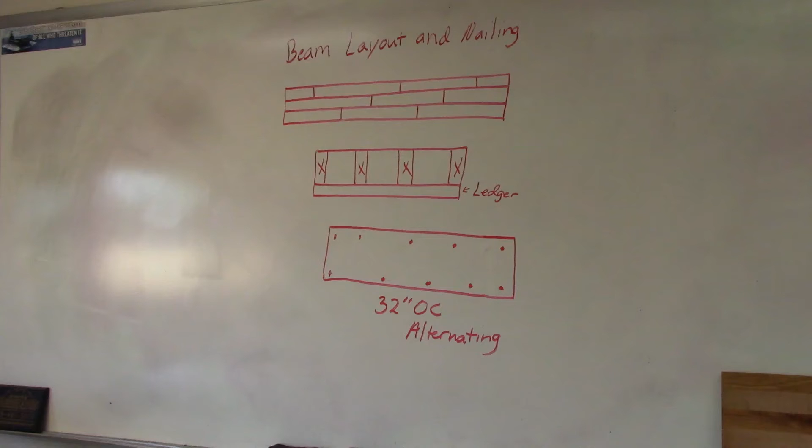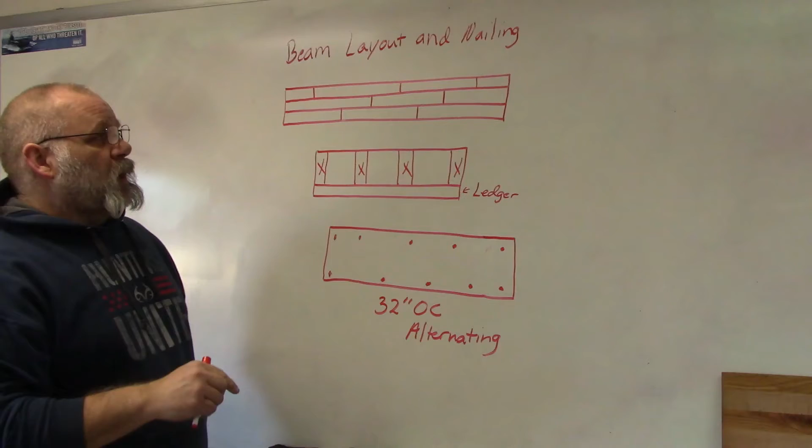Okay, in this video I'm going to show you how to lay out and nail a beam. Things you need to remember with the beam when you're laying it out: first of all, you have the seams where the boards meet. Code says that they have to be at least 4 feet apart. So if this one's here, then this one has to be at least 4 feet from it. This one has to be at least 4 feet from that one, and so on.

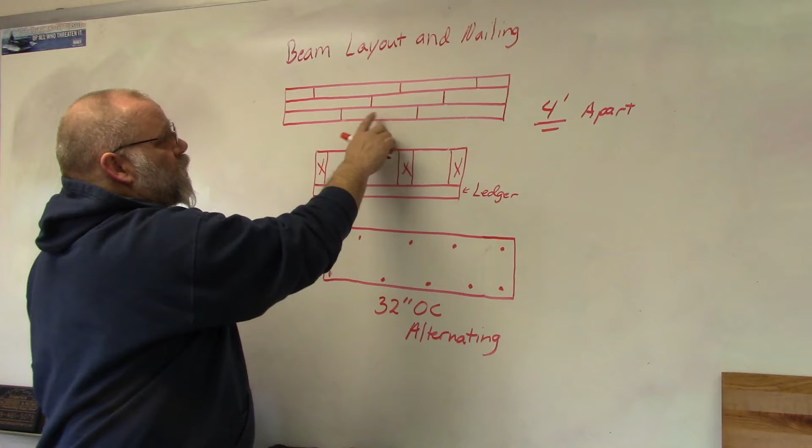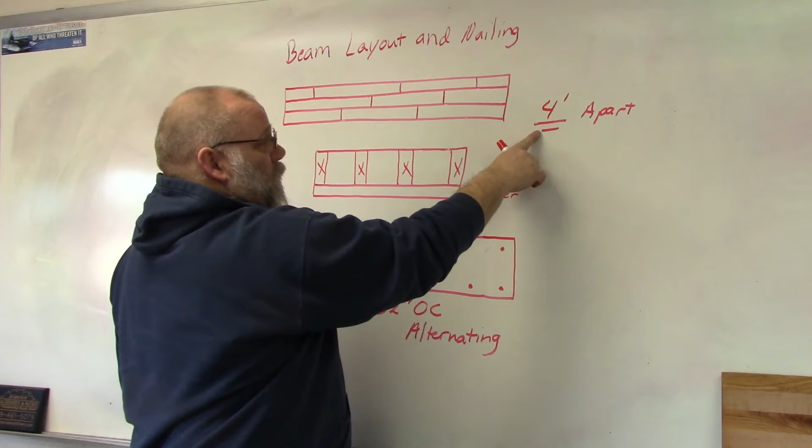So you stagger your members for your beam so that these do not line up from one board to the next. So, seams 4 feet apart. Now, if you're going to put a ledger board on here, so from the side, you have your 3-member beam with your ledger board nailed on there, okay?

Now, code for this says that under each of the floor joists, I have to have 3 nails. Try not to put them all in a row, because if you put them all in a row, that may crack the board and thus weaken it. So stagger them: put the high one to the left, the middle one to the right, the other one in between them, so that they're not in a row and don't crack your ledger board.

Generally, the way I did the ledger board was we took a 2x4 and ripped it in half. We mark a chalk line and put the 1.5 inch side up so it's nice and flat. The floor joist would sit on top of that. Then we would nail each of the 3 nails under each of the floor joists, along with the nails that would go from the floor joist into the beam. So, nailing the ledger board on.

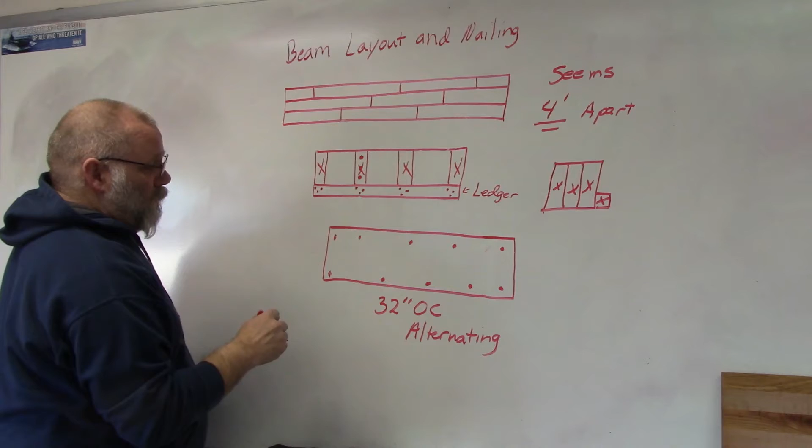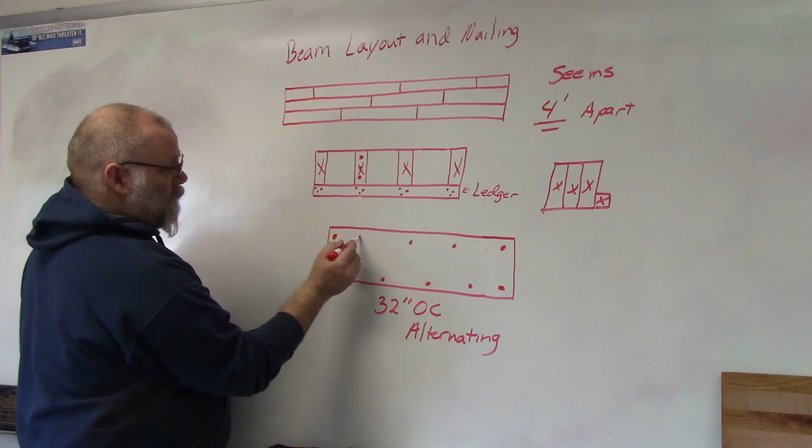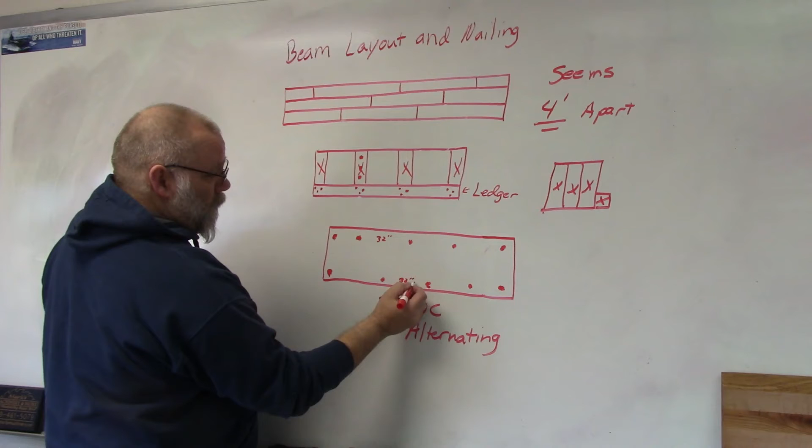Now for the rest of the beam, the code book says the nails have to be 32 inches on center and they need to alternate. So you're going to have 2 nails on this end. That's also the code: you have to have 2 nails on each end, and then you alternate the nails. So these are 32 inches apart. These are 32 inches apart. So you go from here, 32 inches, 32, 32, and then whatever the last one is. And then from here you would go 16, then 32, 32, 32, if that was what the last one would be.

So again, this is what the code says. Remember, the code is a minimum. So if you wanted to add more nails, go top and bottom every 16 inches or something, pop a few in the middle. Personally, I like a few more nails in those beams because I don't want them separating over time. With the expanding and contracting, the nails may start popping loose. So putting a few extra nails in there isn't going to hurt it.

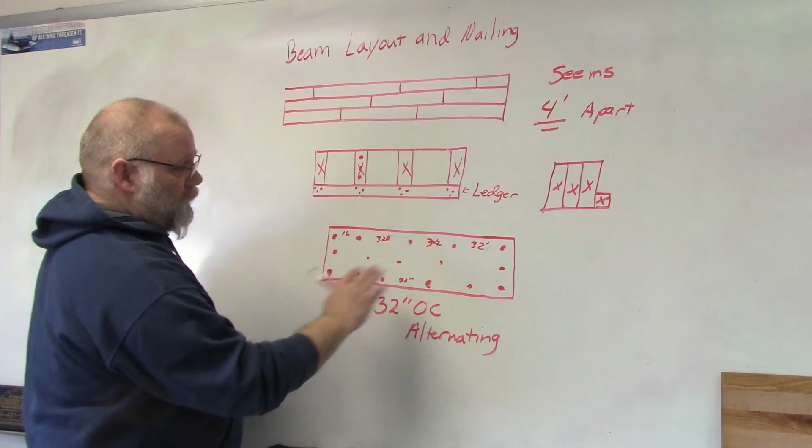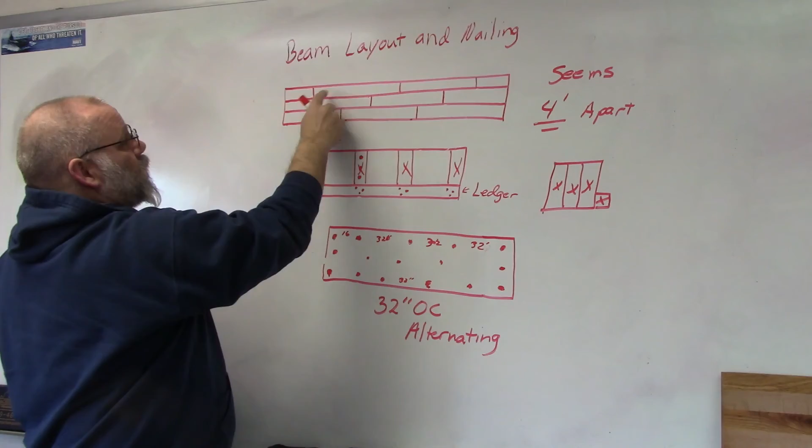Okay, so this is the minimum code, 32 inches on center. They're going to alternate, 2 on each end. So it'll be 2 on this end, 2 on this end of each one of those, and then alternate, alternate, alternate to nail these 2 together. And then from this other side, you would do the same thing. You put this other one on and nail it from the other side, alternating with the same nailing pattern.

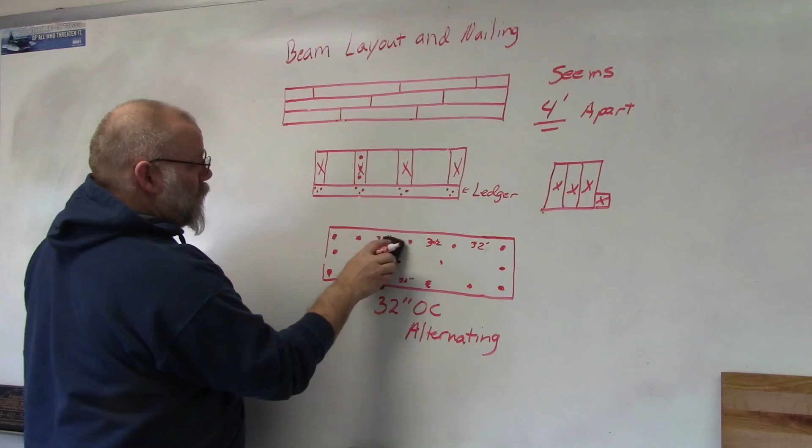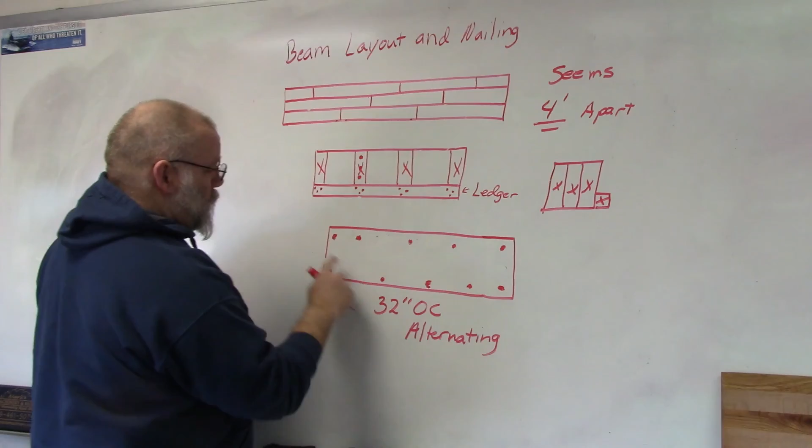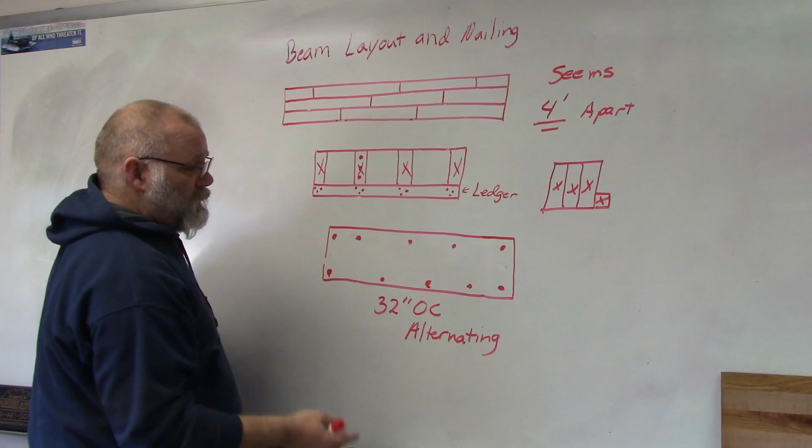So 2 nails on each end, alternating up and down. That way you won't allow the board to cup. So alternate top and bottom, 2 nails on each end at the minimum. Remember, code is minimal. All right, layout and nailing of a beam.